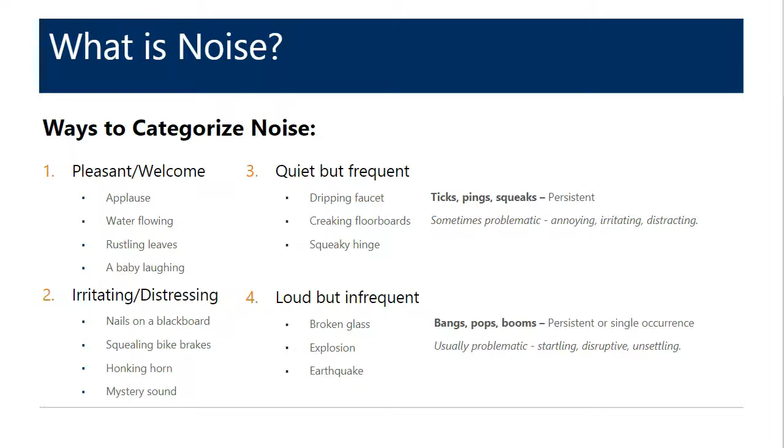We're also going to be discussing sound and noise in terms of sound pressure. So there's some basic metrics for measuring sound pressure. SPL is the abbreviation for sound pressure level. It's measured in decibels, and the range of decibels from quiet to loud or even painful is between 0 and about 140 decibels. So these are some examples of what types of noises land in different decibel ranges.

And the typical background sound pressure level that we find in a building is somewhere around, give or take, 40 decibels—could be a little less or a little more. We often measure that as a baseline for understanding whether a noise is going to be noticeable in the context of that ambient background noise.

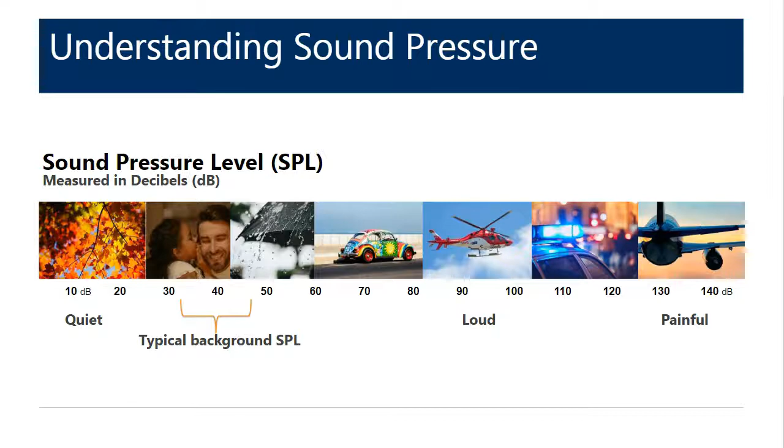Okay, so noises in buildings almost always start as a vibration in a solid material. We're talking about structure-borne noise when we're talking about noises through solid materials, but our ears are intended to hear sound that's traveling through air—airborne noise. So that's typically how we hear it.

We do feel the vibrations in the building, especially the lower frequency vibrations, which are more easily felt. And if you're touching solid objects, your ability to hear that structure-borne noise is going to be enhanced.

So we see vibrations turning into noise through all variety of building materials. It could be curtain walls, punched windows, roofing structures, cladding systems in general, precast systems, structural steel frames experience a fair amount of thermal movement.

Wood structures also experience thermal movement. If you hear a fractured PT tendon, that's a very disturbing sound. It might be a single occurrence, we hope.

People walking around on floors. There are other sources of noises in buildings that are common and fairly well studied, but are not the topic of our presentation today, like mechanical equipment and plumbing systems. And then there's a whole category of studying noises in buildings where we're talking about sound privacy—people, ambient noises, being adjacent to freeways or other noise sources. Those are not what we're talking about today. We're really talking about the building components, the structure and the cladding systems.

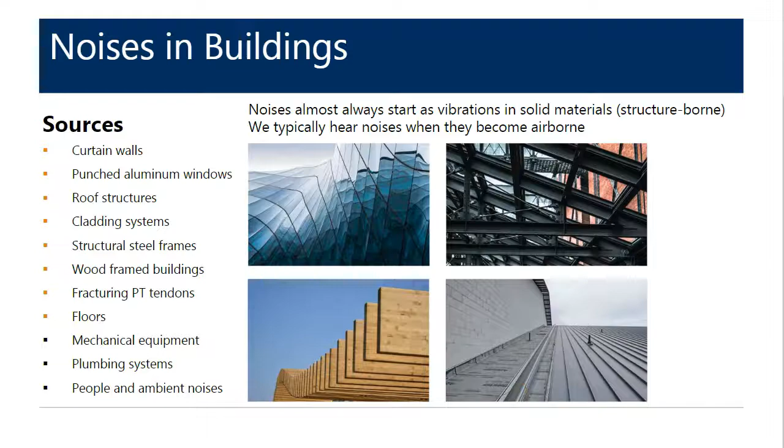So just to recap, we're talking about frequent or persistent noises related to the cladding or the structure, noises that we have identified as disturbing, which can be subjective to the person experiencing it. We're not talking about single occurrence noises because we can't trace those down if there's no recording of them. We're not talking about mechanical systems, noisy neighbors, or sound privacy.

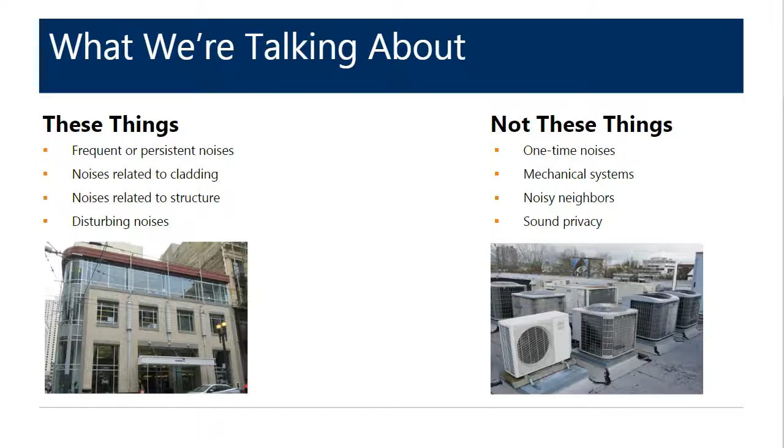I'm going to play for you some sample clips, audio recordings of different types of pings, pops, and clicks that we hear in buildings. What I'm about to play is from a wood structure experiencing thermal movement. Short audio clip here.

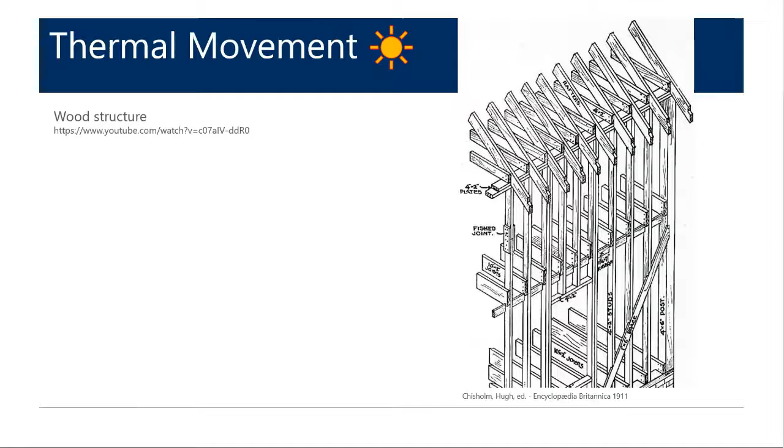We're also going to give you an example of what a curtain wall, aluminum curtain wall or ribbon window wall system can sound like.

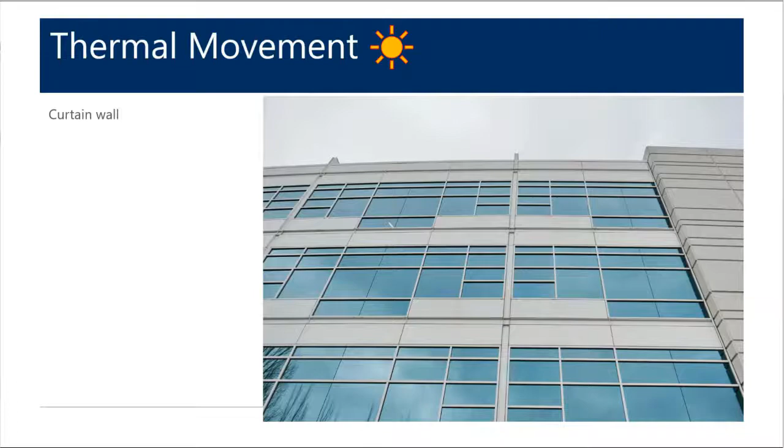You can hear there's a distinct quality difference in the sound, but a similar type of pinging and popping sound.

This is something we're all probably a little more familiar with. Dynamic live load, like people walking across a floor system, can create not only creaking sounds, but also snapping and popping sounds. Here's a recording of what that might sound like.

This is an interesting one. Wind loads, especially on tall buildings—we can see quite a bit of movement in a windstorm, and that can create noises as well. This is a recording from the Burj Khalifa, the tallest building in the world, and it sounds a little bit like a ship at sea.

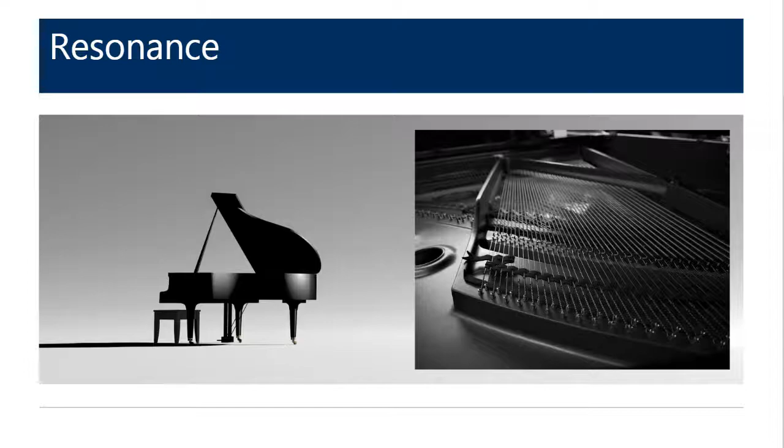When we're trying to triangulate the source of these vibrations, one way to understand this methodology is that it's very similar to the way we look for the epicenters of earthquakes. We understand how fast these waves and vibrations move through a solid material, and using different sensor locations to monitor the vibrations and understanding when that wave arrives at each sensor, we can work backwards to find the epicenter. You'll see diagrams that look similar to this that we use to track the source of vibrations.

Industry standards for understanding how to measure noises in buildings—this is a blank slide because there really isn't much out there for the types of noises we're talking about. Now, for steady state type sounds like mechanical systems, there are standards, and ANSI S12.2 is a criteria for evaluating room noise, but it's only tangentially applicable to the types of ticks and pings we're talking about here. So that's okay—we've got methodology to work with, and there are a variety of tools we can use to assess noises in buildings, but there's not a lot of industry standards in place for us to rely on.

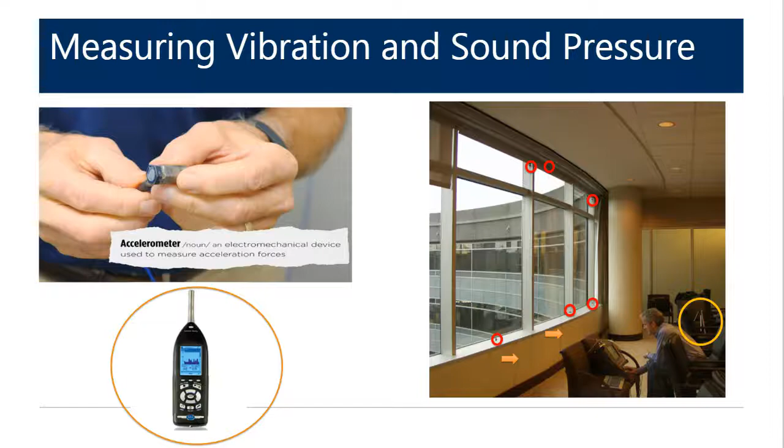To log all of this data, we generally use a portable laptop connected to a multi-port data logger, and the data logger captures the information from the accelerometers and from the sound meters and transmits it to the laptop.

Having the laptop on site is very beneficial, especially during the beginning stage of a project, because it allows us to see the response from the accelerometer in real time, and also correlate that to the sound, if we're lucky enough to hear that sound while we're actually on site.

Although we can look at all this in real time, we typically set up these systems so they can be logged and viewed remotely. This is pretty important because most of the time it takes multiple days to log enough events to get a good idea of the source of the sound.

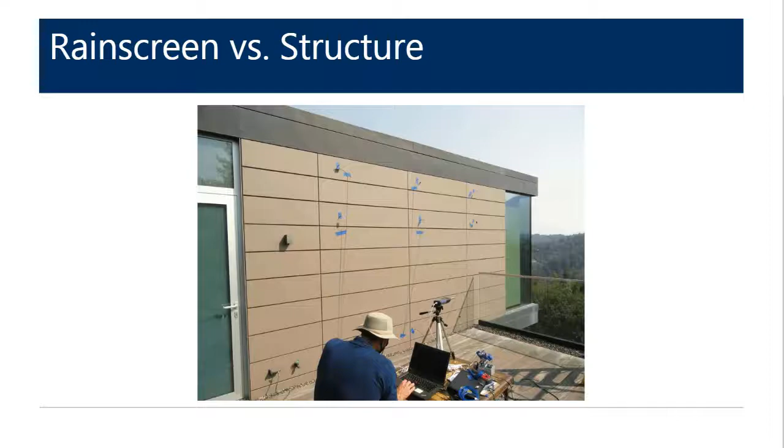The system is very complicated and has a bunch of different parts, including the terracotta panels, which were connected to horizontal aluminum rails, which were then connected to vertical hat channels fixed to the actual wall. There were also metal springs placed between the terracotta panels and the horizontal aluminum tracks to keep the terracotta panels under tension so they wouldn't clank during a wind event.

With all of these points of contact, there is potential for friction, and anywhere we have friction, there is a potential to cause sound, or if anything slips, it can generate sound. As you can see with this type of detail, there are definitely multiple points that could cause that sound to occur.

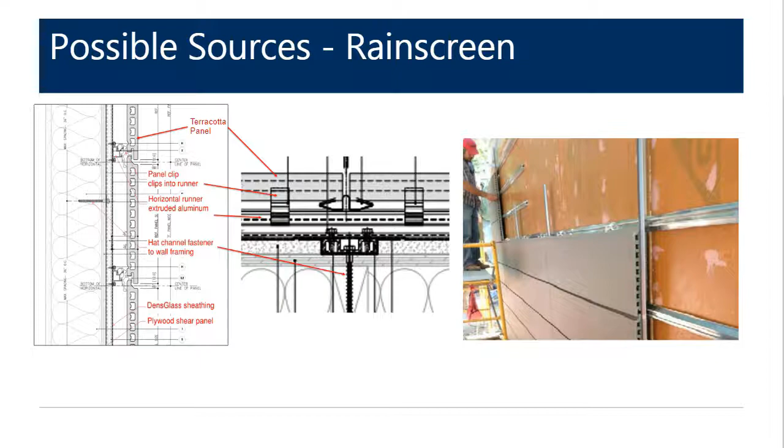Just as with the rain screen, all these multiple parts and connections are prone to generating noise anytime there's a slip or some friction occurring between these different elements.

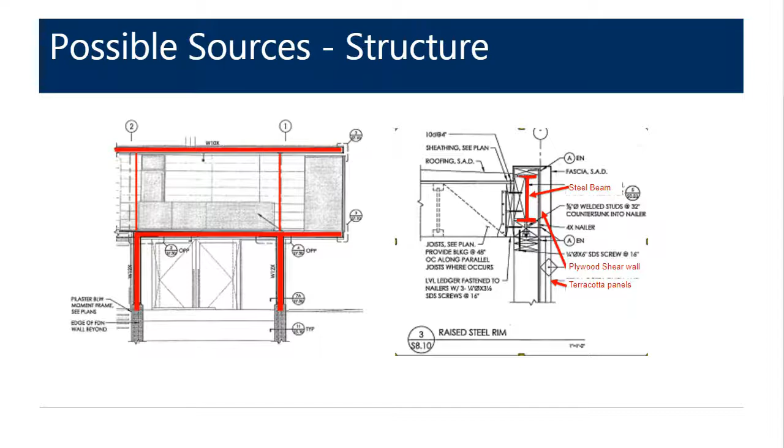So after the document review and getting an idea of what the building consisted of, we were tasked with trying to figure out where the source of the sound is that the owner is hearing.

To do this, we installed a number of accelerometer arrays on different parts of the building, interior and exterior walls. The hope was that with the installed arrays, we could record enough sound events to pinpoint the source of the sound.

We assume that the vibrations travel at the same speed to each accelerometer, and then going back in time from each accelerometer's initial point of excitation, we can draw circles that estimate how far that particular vibration could have traveled in a given amount of time.

The intersection of all these circles identifies the origination of the vibration, and that vibration is then thought to be the source of the sound.

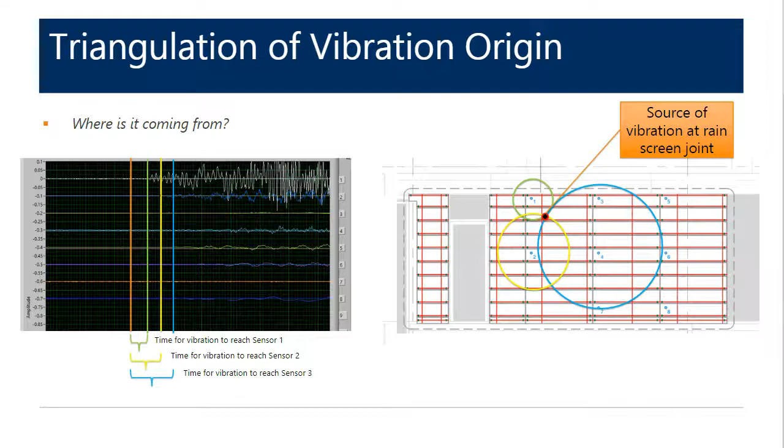In conjunction with triangulating the source of the sound, we also look at the amplitude of the sound and try to correlate that amplitude to the waveforms to see if there are any patterns.

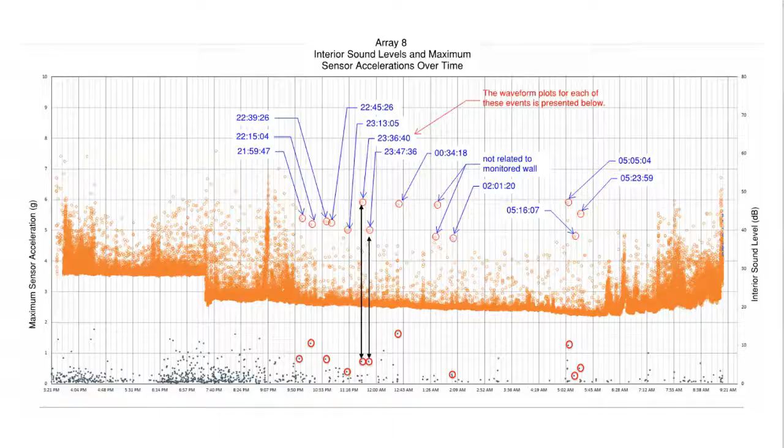With the number of sounds correlated to waveforms, we're able to look at those waveforms. Now we know what the sound sounds like, and we can correlate that sound to a specific type of waveform. For this particular project, we determined there were actually two different types of sounds. One was generated by the rain screen.

I'll play a sample sound of the rain screen. In this clip, there are actually two popping sounds in the very beginning, and at the back end of the recording there's some construction noise. This gives you an idea of the amplitude of what we're dealing with on site.

Hopefully everybody heard those little pops. As I mentioned, those pops were only picked up by the accelerometers outside and not from the interior.

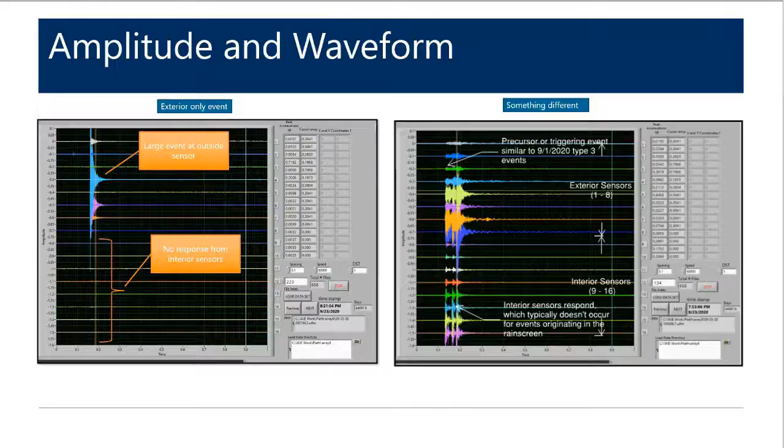You should be able to hear a distinct difference in the type of sound. One is more of a pop, and this one is more of a crackle sound. Hopefully everyone was able to hear those differences.

Based on a review of the acceleration data and all the sound amplitude data, our investigation concluded that the cladding did make noise, but the loud booming noises most disturbing to the owner were not related to the cladding. The cladding noise was very frequent, on average about two pops a minute, and generally correlated with exposure to sun, mostly occurring during the daytime.

The loud nighttime booming noises we correlated to thermal expansion and contraction of the structural steel beam located along the roof and how it was connected to the plywood framing.

As that steel beam expanded, it's dragging the plywood shear wall connected to it, causing all the nails along the perimeter of the shear wall to shift and pop. That's what we attributed the large booming sounds to.

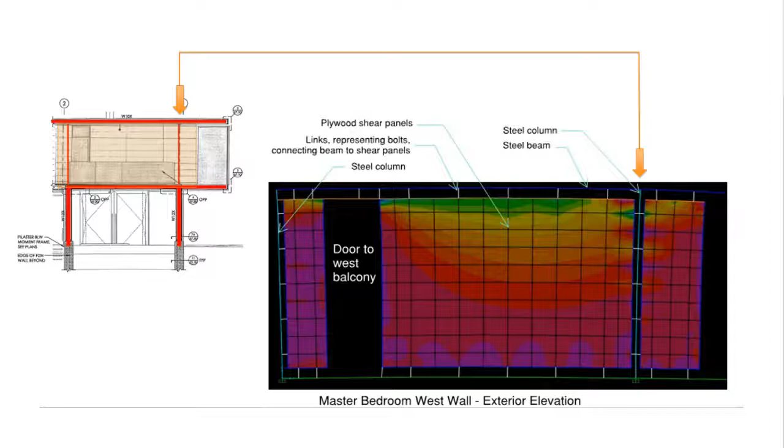So let's take a look at another recent project with similar sounds. This is a multi-story facility, and the sounds were so loud it was distracting to employees, which is why we were called in to figure out the source of the sound.

Typically the sounds were most disturbing during warm summer days when there was full sun exposure on the south-facing elements of the building.

This particular facility consisted of a multi-story building constructed with a steel frame that supported a precast curtain wall system. The curtain wall system is supported by multiple steel connections that attach the curtain wall to the steel framing.

The only difference was that in between these two brackets, there is a steel shim plate. In the fixed connections, that shim plate was welded to both the top and bottom bracket, while on the free connection it was only welded to one side, allowing that other bracket to slide on the shim plate.

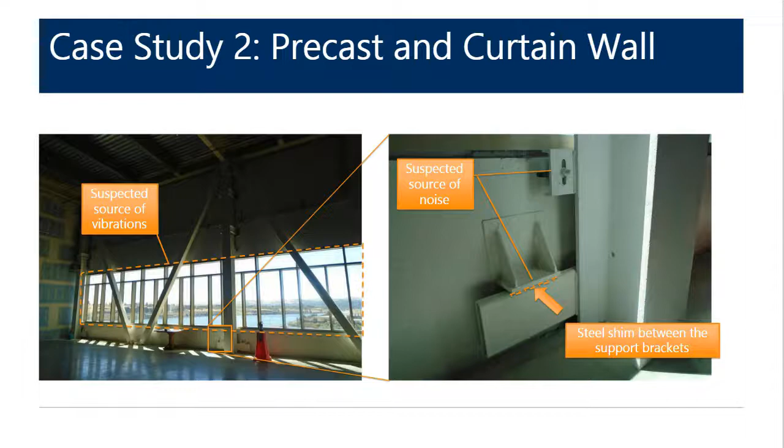To investigate the source of these sounds, we again installed a network of sensors on both the ribbon windows and precast curtain wall panels. We did this at multiple locations at different floors to try to pinpoint the source. This slide shows a typical sensor layout.

We include 16 sensors, which are accelerometers, installed on both the curtain wall as well as the window elements. The image on the right shows a graphical representation of where accelerations were determined to be occurring.

The bubble, located over a sensor location, represents the quantitative amount of sound produced by that location over a period of 24 hours. So the larger the bubble, the more noise that particular location makes.

But the size of the bubble is also cumulative - if you have a 1 decibel amplitude sound generated by that location 100 times, the size of the bubble would equal one noise that generated 100 decibels. So you can't just look at the size of the bubble to determine the amplitude of the sound. It's more of an average over a 24-hour period of how much sound is generated by each location.

In any case, sensors 4, 5, and 6 coincide with the free end of the precast curtain wall panels. You can see that each one of those, especially location 6, generates quite a bit of sound, with location 6 actually causing the loudest sounds, which is expected since this is the free end of the panel and it's sliding on a steel plate. So you'd expect some sound to be generated there.

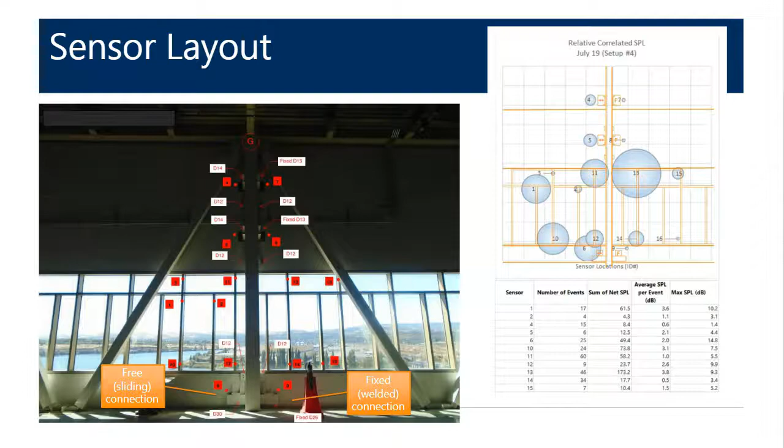We also measured the perceived amplitude of the generated noise. For this particular project, we weren't able to correlate the amplitude to actual sound - we weren't allowed to make sound recordings due to the sensitive nature of the building. So we limited our sound meters to just measuring sound amplitude, not actually recording a sound.

This made figuring out what sound actually correlated with our accelerometer readings a little bit difficult, because any sound - a door opening or somebody bouncing a basketball or anything - would have been picked up and recorded as a sound amplitude. So it took some time to look through the timestamps and figure out exactly which amplitude correlated with which acceleration, but we were able to do that.

It was noted that in general, the loudest sounds were about 15 decibels over the ambient noise. But there were some events, which I'll show you in a bit, that were actually much more than that, up to about 80 decibels, which is about 40 decibels over the ambient noise. By doing this correlation, we determined that the loudest noises were generally caused by the precast panel connections.

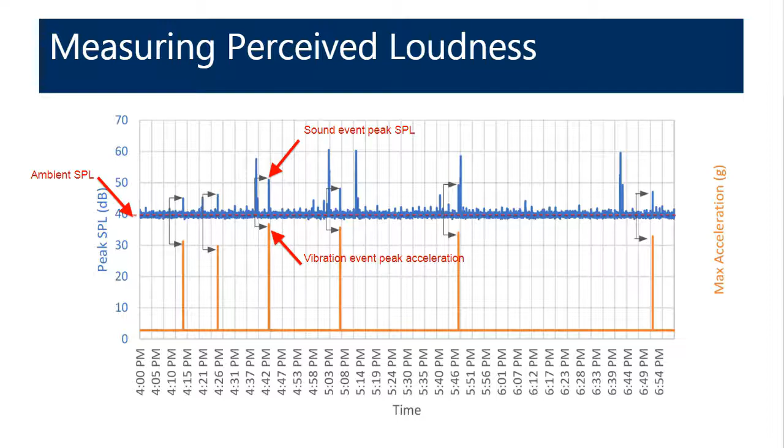One interesting thing we noted during our investigation was that at one location, one of the fixed connections was actually making quite a bit of noise. This fixed connection is highlighted here by sensor 1, and you can see that its max sound pressure level, or decibel level, was generating about 27.5 decibels over ambient noise.

We concluded that there was probably a broken weld that had occurred at this location, which was causing the sound. This same location is also the source of the loudest noise that we heard - a free connection located on the bottom left-hand corner here. This particular connection was causing about 40 decibels of noise, a kind of booming sound that was resonating throughout the whole building.

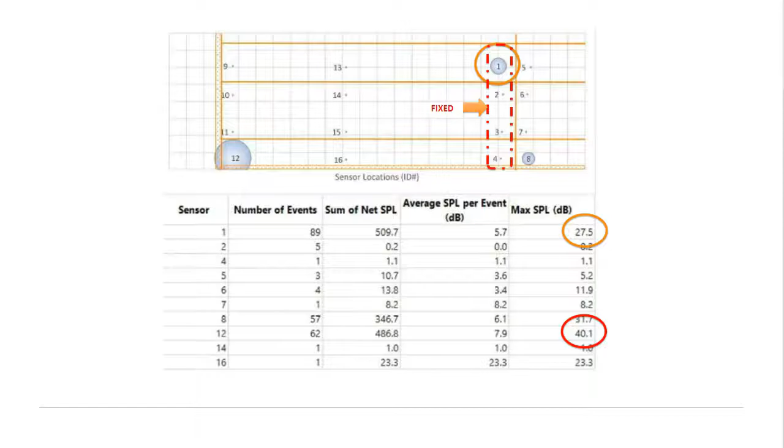At the beginning of the project, we were told that the noise was only occurring typically during sunny days, when the sun was actually on that south wall. Our instrumentation identified that the sounds were actually occurring throughout a 24-hour period, but that during midday, the sounds occurred much more frequently, with the period between noises very close - a lot of pops and pings, back to back.

And then throughout the evening, there was the same amount of sounds, but they were distributed farther apart. We were probably never told about the evening sounds because there was probably nobody in the building to hear them.

We also learned that the sounds first started at the ribbon windows, and then later in the day, they started to occur in the precast panels. We attributed this to the precast panels having a much higher thermal mass than the ribbon windows, and therefore they were kind of slower to react to the thermal changes.

At night, the sounds were just as loud, but they occurred farther apart. We attributed this to the heat gain or thermal expansion occurring much higher or faster during the day because it was caused by solar radiation. At nighttime, the cooling was just through convection, so the elements lost heat more slowly and therefore generated the sounds farther apart.

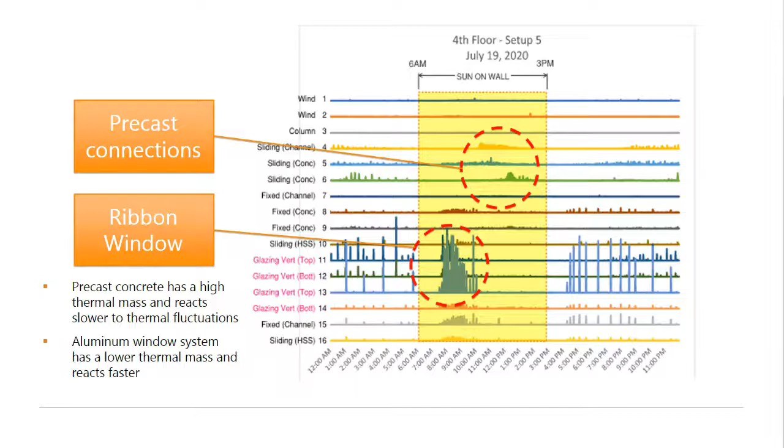Our instrumentation for this particular project confirmed that, in fact, the sound was occurring both at the ribbon windows as well as at the precast connections. The precast connections were found to generate less frequent noise than the ribbon windows, but the sounds tended to be louder. At the precast windows, the sound was typically concentrated near the free ends of the precast panels.

A recommendation that we provided for this particular project was to retrofit the free ends of the precast panels with some Teflon sliding pads to decrease the friction. And then a more complicated recommendation would be to install split mullions at the ribbon windows where the ribbon windows cross the moving joint in the precast curtain walls.

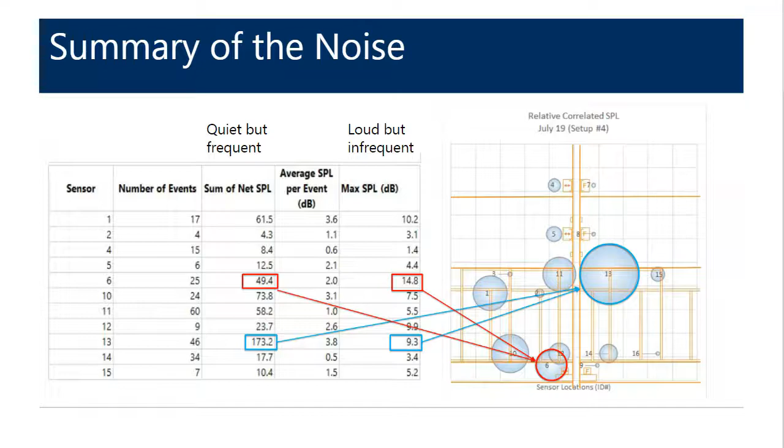With that, I will hand over the presentation back to Sylvan, and he can talk a little bit about the mitigation strategies that we've recommended in the past for this type of issue. Great, thanks, Jarkko.

All right, well, let's talk for a minute about some usual suspects. As we mentioned earlier, factors that we typically consider are wind loads and live loads, looking at how much deflection we anticipate in any given location, looking at solar orientation, interior and exterior temperatures - solar gain and thermal mass tend to play a role.

As we discussed with the precast panels and the curtain wall systems, the thermal mass there changes their response time, thermal gain over the course of the day. So those different response times can exacerbate differential movement. You could have the same type of thermal expansion and contraction, but if it's not occurring at the same times, you get differential movement.

And so expansion joints, sliding connections - an important phenomenon to understand here is the stick-slip phenomenon, which is happening at the types of sliding joints like steel on steel plates, where we have very heavy cladding panels resting on a steel plate, and the coefficient of static friction is high.

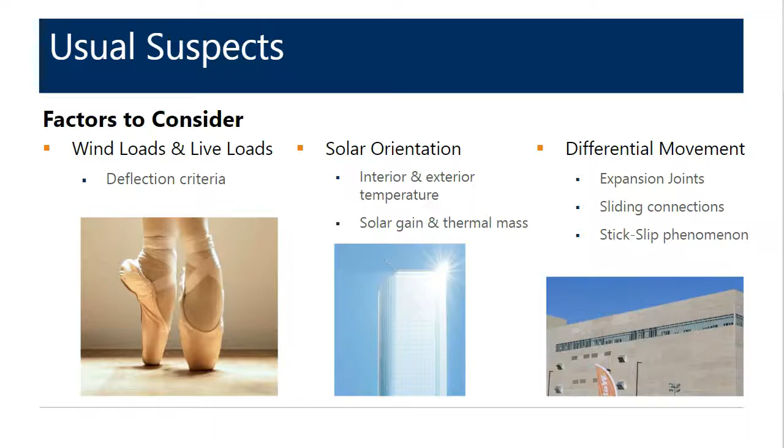So when we're talking about wind loads and live loads, just to sort of understand what that means, here's some examples. Wind loads, we're looking at interstory drift anywhere from H over 600 to H over 100. So for a 14-foot interstory height, that could be 1/4 of an inch of drift, or it could be well over 1.5 inches of drift. Understanding how much movement we're trying to accommodate can really help us anticipate where we're going to see that stick-slip phenomenon and how dramatic it will be.

For live loads on floors, L over 360 is pretty typical for deflection limits, and over a 30-foot beam, that could be 1 inch of deflection. Sometimes there's going to be more conservative limits on that, like 1/2 inch for steel construction, or as little as 0.3 inches for concrete. Understanding the movements and accommodating them helps us anticipate where we're going to see the sources of vibrations.

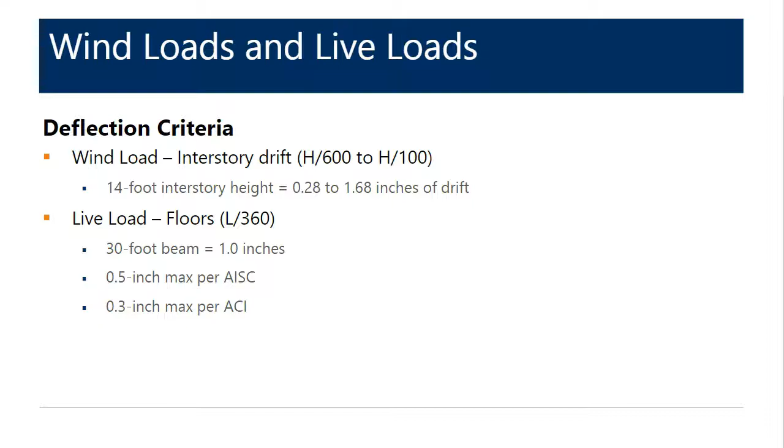I'll talk a little bit more about solar orientation because thermal expansion and contraction show up over and over again in our investigations of these issues. Solar radiation and color are closely linked issues here. The absorption factor, the amount of that light that's converted to heat, can be dramatically impacted by the color of the material. A white smooth surface might absorb 25% of that light, convert it to heat, or maybe 30%.

If you go all the way over on the right side of this chart, a dark blue and black material, we're going to get well over 75% absorption factor. So we're getting much higher conversion of that incident sunlight into heat. So we're going to get significantly higher temperature rises in dark colored materials.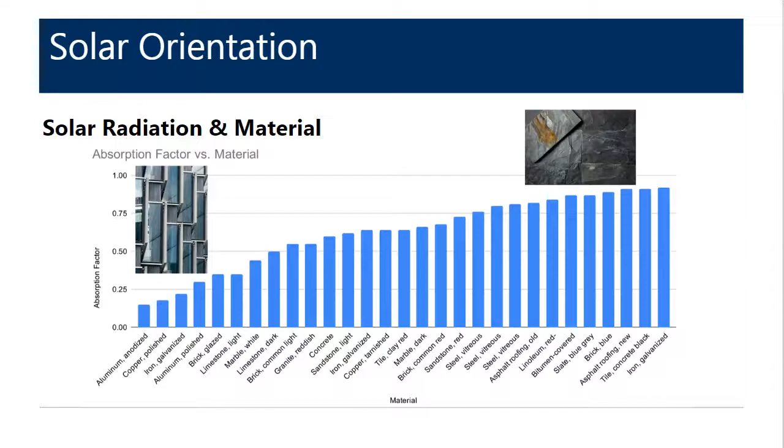So if those two systems are rigidly attached to each other and they experience the same temperature deltas, then we've got to accommodate that movement somehow.

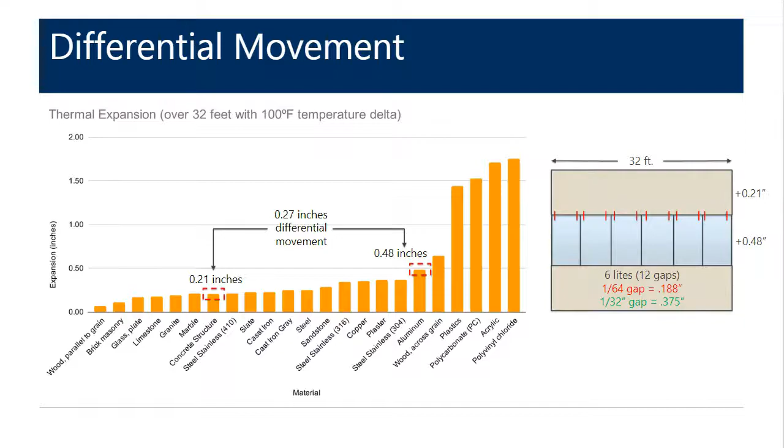One other thing to note, and I just think this is interesting, is that thermal expansion isn't necessarily the same in all directions. Wood across the grain has a much higher thermal expansion coefficient than wood parallel to the grain. Just because it's wood doesn't mean it's moving the same in all directions. Most materials aren't that way.

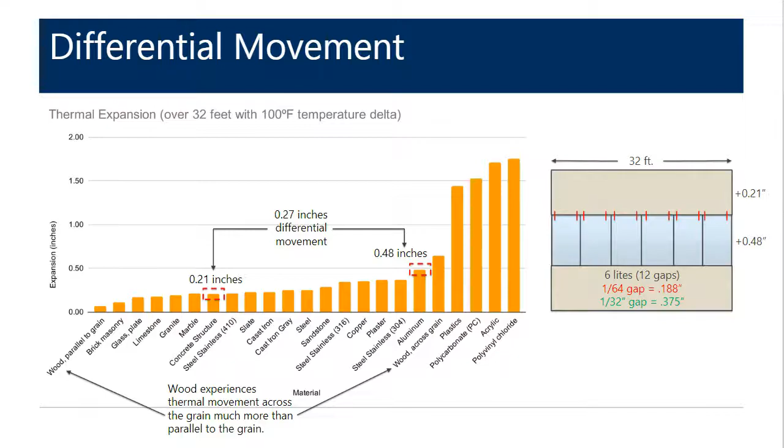Okay, so let's talk about how to mitigate, maybe eliminate—although that can be difficult—and hopefully avoid some of these issues, so we can reduce differential movement. We were just talking about how to anticipate the amount of differential movement, and how material selection, color, and adjacencies, and also where we place different types of connections—whether a fixed connection or a sliding connection—can really affect the differential movement.

And also where we put insulation. If there's a steel beam that's outboard of the insulation in the wall, it's going to experience much higher thermal movement, temperature differentials. So we can also install expansion joints, sliding connections—coordination of movement, which I think I talked about already.

This is a picture of an expansion mullion in a curtain wall or ribbon window system. It's designed to accommodate that movement along the length of it.

Interestingly, we did have a problem on a project once where in the morning the sun was shining on one side of those split mullions—one side was expanding differentially from the other—and then in the afternoon, the sun moved around to the other side and created an issue. We were able to mitigate that by actually placing some insulation over the mullions.

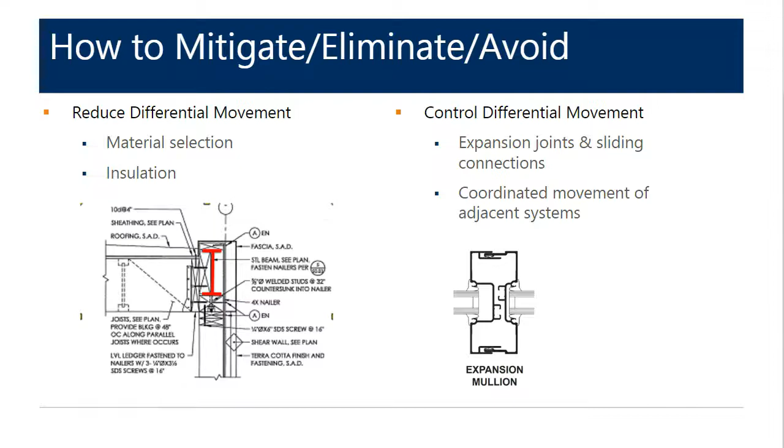A parting note: going back to that metaphor of the piano, we need to understand what's causing the sound, which may not be the same object that's the origination of the vibration. We want to find out what string is being plucked that's making the noise, and what the sounding board is that's generating the actual volume we're hearing. We can mitigate the noise from both approaches: damping the vibration by damping the string, or damping the sound by adding mass or damping to the sounding board that's creating it.